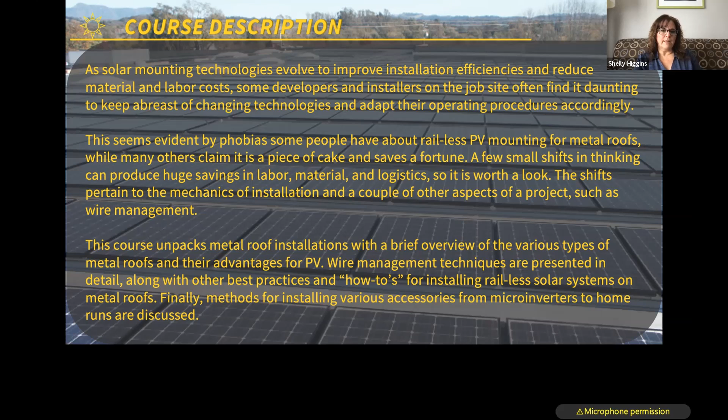So our learning objectives: upon completing this course today, you will learn why metal roof is a perfect solar platform, define the advantages of rail-less solar PV mounting systems, understand how solar on metal roofs proves to be the most economical and eco-friendly, learn best practices for design and deployment of wire management, and describe best practices for installation techniques and other balance of system requirements and components. Our focus will address these major concerns: PV system design, wire management, specific installation techniques, and module level power electronics.

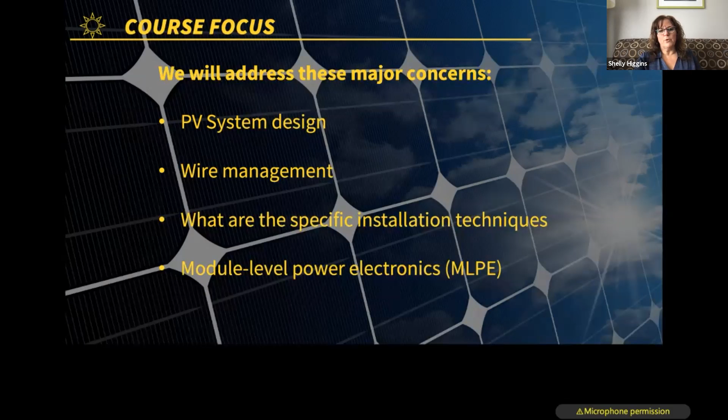The challenges we're facing in the EPC and installer space are evolving technologies. They change so quickly that once you've learned something, you have to learn it again. With installation teams in the field, this affects labor savings. If you learn new methods and use them, they can produce material and labor savings. But there are learning curves—pulling well-trained teams back to learn something new slows them down. We want to encourage you to do this anyway, because resetting the learning curve takes time but ultimately speeds things up and makes it more advantageous.

And I'm going to, oh no, this is me yet, I'm sorry.

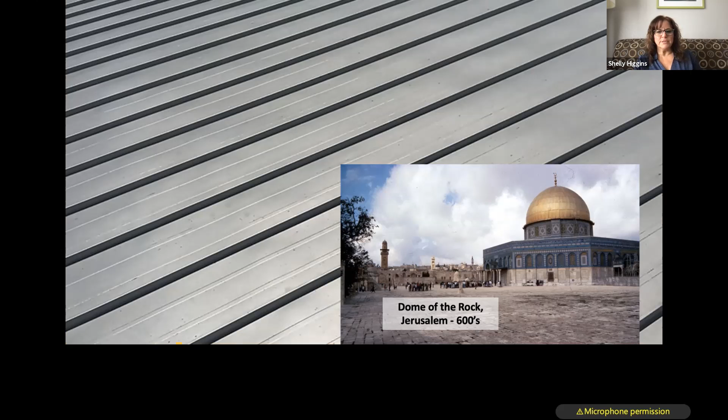Brief history on metal roofing: metal roofing is not a new thing, it's been around for a very long time. Some of these iconic buildings have been around for many years—structures like Dome of the Rock, St. Marco's Cathedral, the Blue Mosque, and Notre Dame. If you notice, they've all got metal roofs, and they've been around for a very long time.

So here we're gonna take it off. This is you, right, Mark? No. No, this is me. I'm sorry. I'm like ready to jump the gun here.

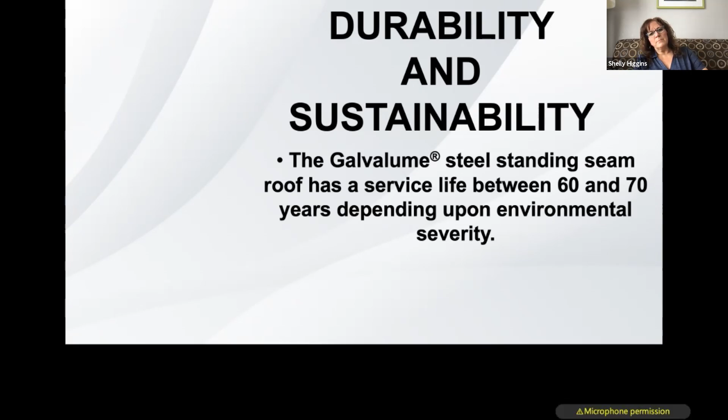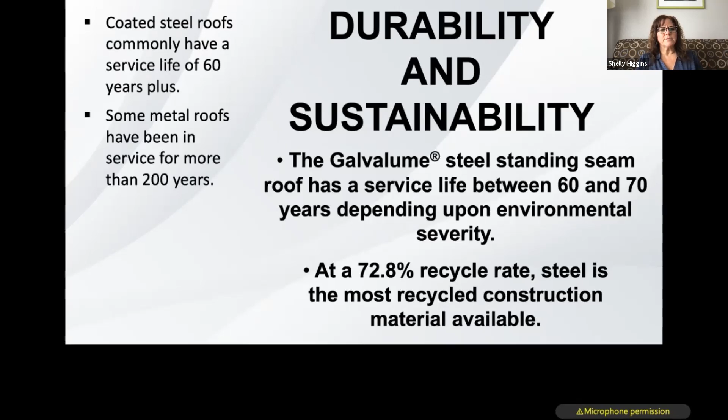Durability and sustainability: a standing seam metal roof has a service life of 60 to 70 plus years, depending on your environment and environmental severity. It's the most highly recycled construction material available. You really want to think about these things because they affect your solar system—think of the roof as your foundation or basis, part of your solar system. Whatever you're mounting it to becomes part of it. Standing seam metal roofs especially last a very long time, longer than the solar system itself, and that's something you need to take into consideration.

There are metal roofs out there that have been around for more than 200 years. Remember, the roofing is 100% recyclable, and it just makes economical sense. Last but not least, it costs less to install on metal roofs, and Mark's going to go into that.

Okay, so I'm taking over. First of all, thanks Judy and Kaylin for allowing us to speak, and thanks Shelley. So I'm going to get into really the differences—what is a rail-less system versus a rail-based system to start off with. I'm going to do it with pictures.

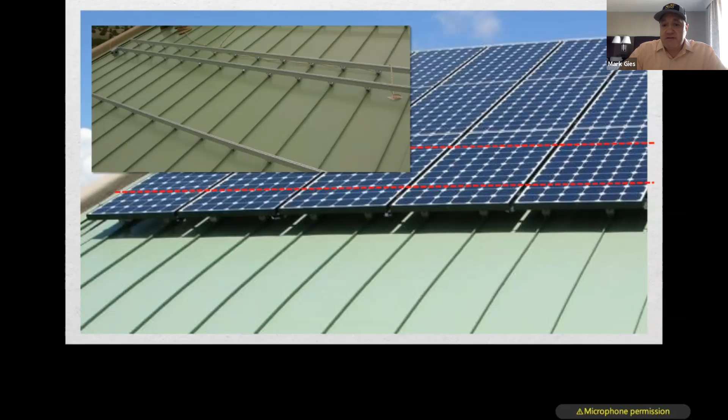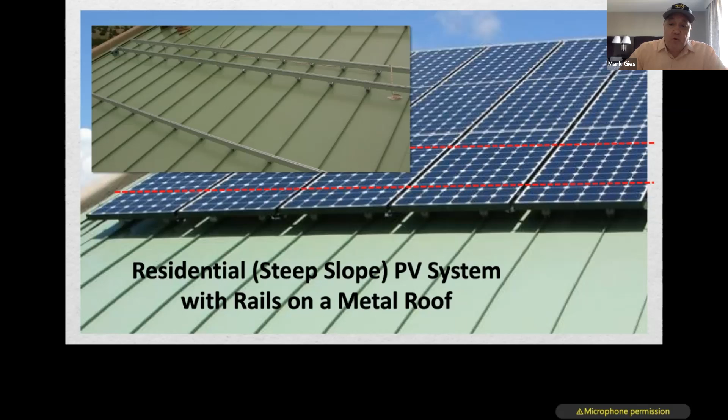And then you go down and start your real installation. With a railless system, you really don't have that first part of the installation process. This is a steep slope residential. Another thing you'll notice is that the rails go perpendicular to the roof seams, the metal standing seams, and the modules - the long side of the module - are perpendicular to the rails. So that's what we call portrait orientation.

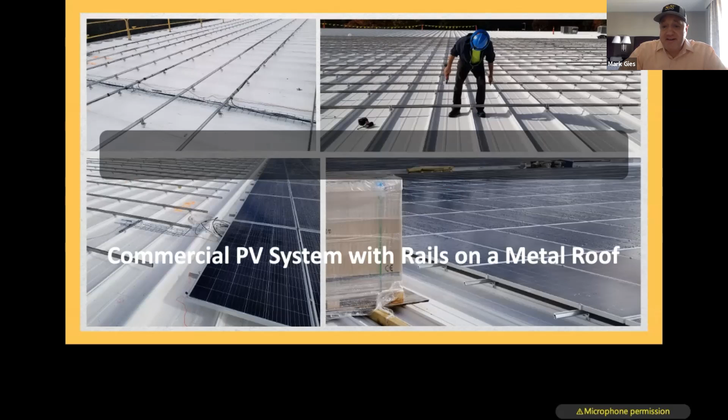Now let's go to a railless system. This is a direct attach or railless - we use those terms interchangeably. So the clamp on the module is directly attached to this metal roof, in this case standing seam. You can see that on the left. So there's no rails, and in a lot of cases these direct attach systems, you attach the clamps on the fly as you install. So you don't have that first step I was talking about.

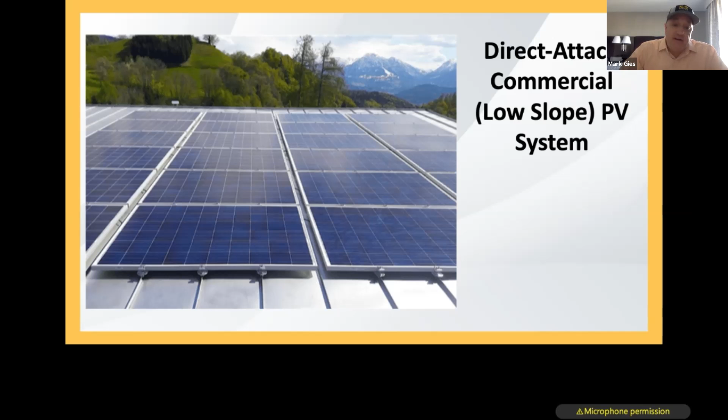But with a railless system, using the standing seam as your rails, they're there already. Here's another example of a railless system, direct attach. This is on an exposed fastened, trapezoidal roof. Same thing - this is in a high wind area, so they're mandating that we have 6 attachments per solar panel. You can see that there are plenty of the ribs there, plenty of those trapezoidal shapes to do the job.

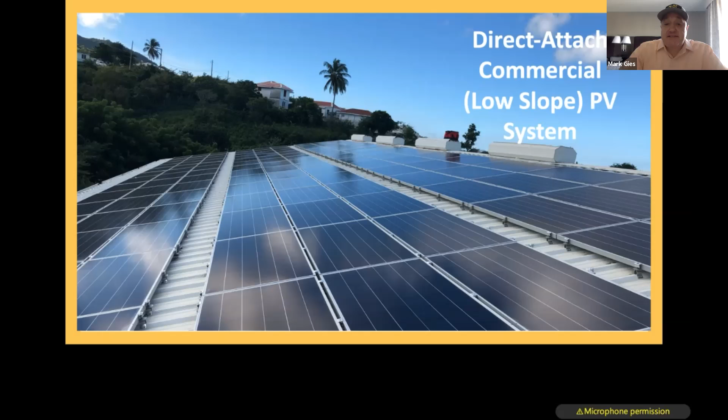The other thing that happens when you got the extra attachments in those high wind areas, it's also strengthening the roof and preventing the seam from unzipping. In the case of standing seam, the clamps actually help keep the roof panels attached onto the purlins, onto the building itself.

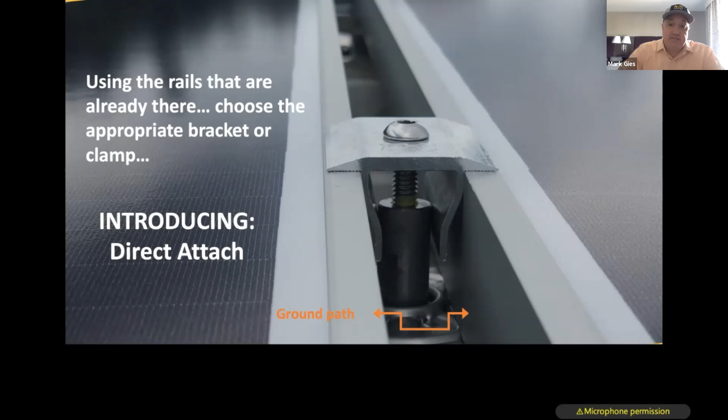One thing looking at products, there's various ones out there. One feature that some have is that bottom piece acts as a bonding and grounding element. Those modules, the frames, which have to be grounded, all the frames on a system have to be bonded to ground to meet electric code. So that achieves that without having to add wires. That's a good feature that some of these have.

Here's a more close-up view of a clamp, and it's really two pieces. Most of these are two pieces, where from that disc up is really the clamp, the direct attach, railless system. Below it are the mini clamps, and those could be most any roof clamps that attach to metal roofs, whether standing seam or exposed fasten roofs. From this disc down is basically the current technology in clamps that's been out there. So it's really a marriage of the clamp and this technology for clamping to the roof in one piece.

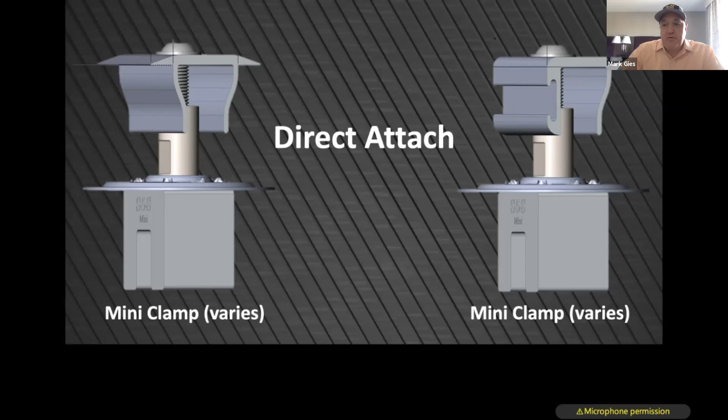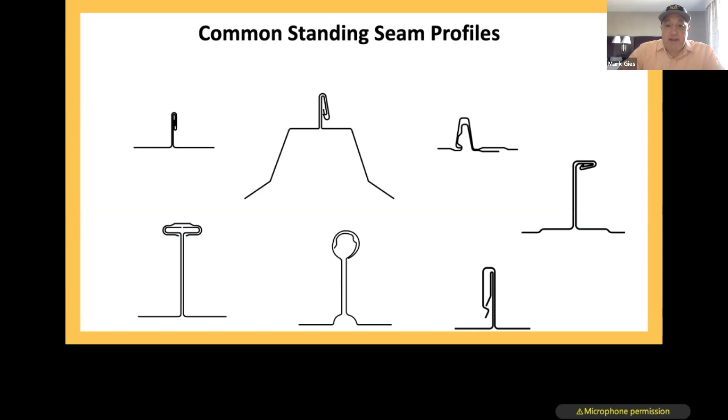So to further this point with standing seam, there are all kinds of different products out there, different roofs, different types of seams. Some are snap lock, some are mechanically seamed. So basically you need to find the right clamp to fit the right roof to then attach your direct attach PV system to that. They're out there.

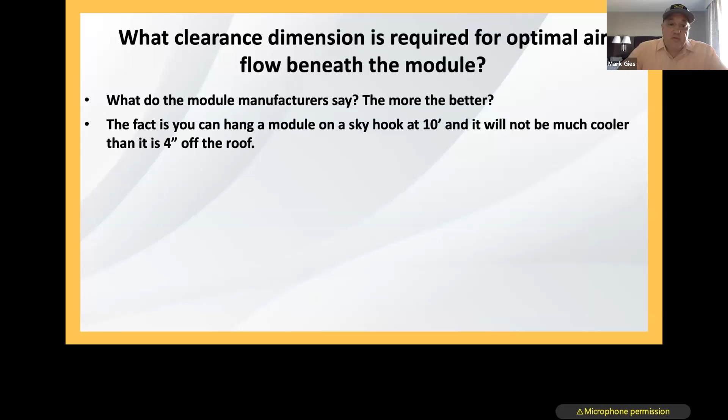Talking about that clearance, one concern is airflow. Is there enough airflow to keep the temperature down so you don't start losing efficiency in your module, which happens especially on hot days anyway. If you talk to a solar panel manufacturer, they say more is better, they want it 10 feet off the roof, which is really unreasonable and not needed. Research shows, and I'll show a study in a second, that the sweet spot is around 4 inches, and once you're past that you get negligible effects of height. So you don't want them a half inch off the roof, but in that 4-inch neighborhood, there's enough airflow to work properly.

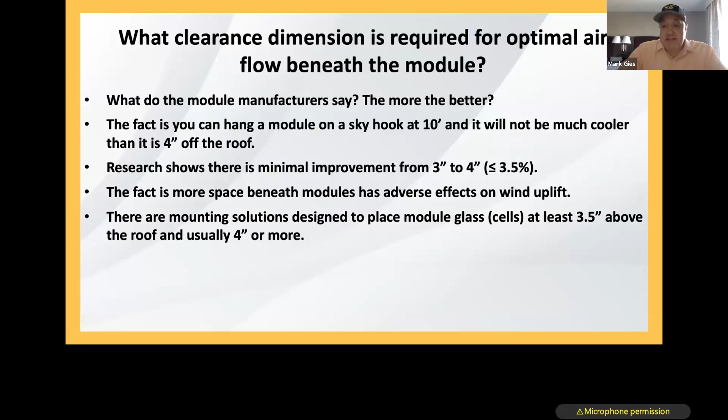As I said, the higher modules are off that roof, the more wind forces, so you have to take more care, more engineering is involved in attaching them properly and keeping them on the roof. Generally, the direct attach system is in that 4-inch neighborhood, which is adequate.

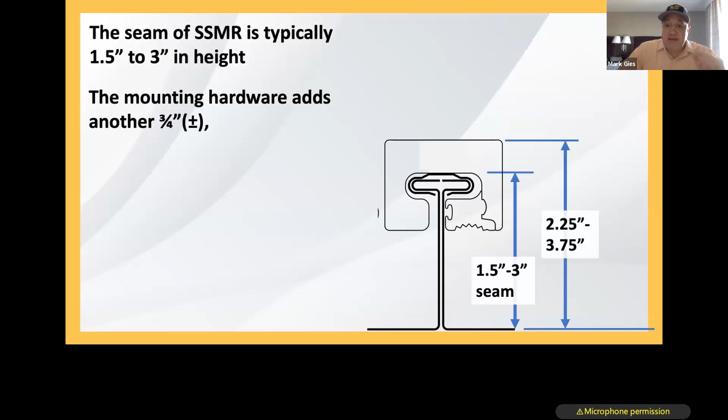Here's a typical direct attach on a standing seam roof. The standing seam can be 1.5 to 3 inches. There's the clamp, and above that clamp is the module. The module sits on that basically, with an overhead clamp on it, and that stack-up is where you get into that 4-inch neighborhood at the minimum. It's usually more than that.

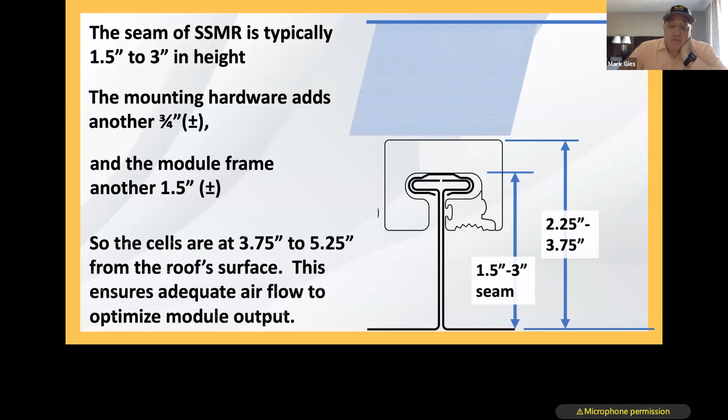You have to have a seal. In this case, there's a seal of the bracket itself, and then the screw itself has its own seal to ensure that. Products get tested to an ASTM test that you should look into, to confirm it's being done on the product you're specifying.

There are some screws that are drilling point screws that just drill a hole, and then you only get really one thread to prevent pullout, whereas some screws are self-piercing, which push in, penetrate and create a tunnel. That tunnel actually provides more thread so you have a higher pullout resistance. So piercing screws are improved, better than self-drilling screws in these instances, because these are only attached to the sheet itself, not to the structure.

Here's a universal one - sometimes you can't find a specific bracket, and there are a lot of different trapezoidal shapes out there. There are examples of these that are fully adjustable, not only from the trapezoid point of view, but can go up and down to help improve the aesthetics of the solar system in the end. You can just put a direct attach system to the top of that as well. The same thing goes - you have to look for the right product that has the right testing done and the right performance.

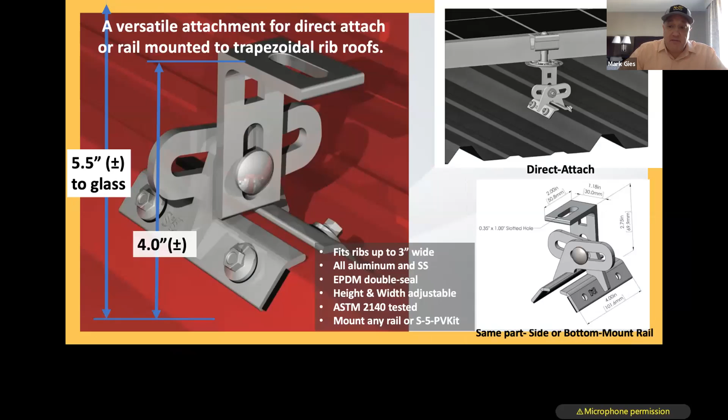I don't want to dwell on it, but here's a corrugated roof product - the same, there are products for that as well to do direct attach on corrugated roofs.

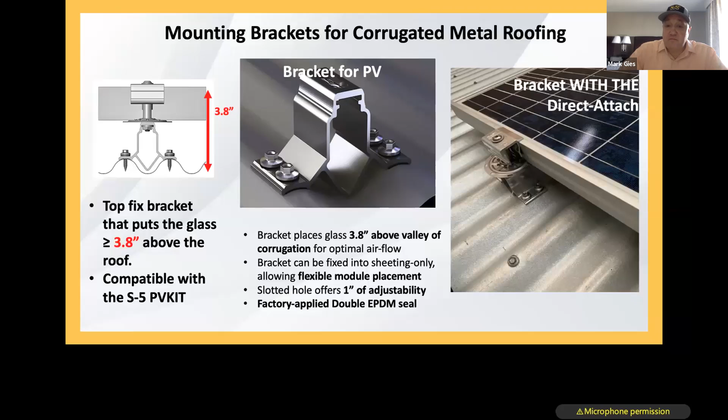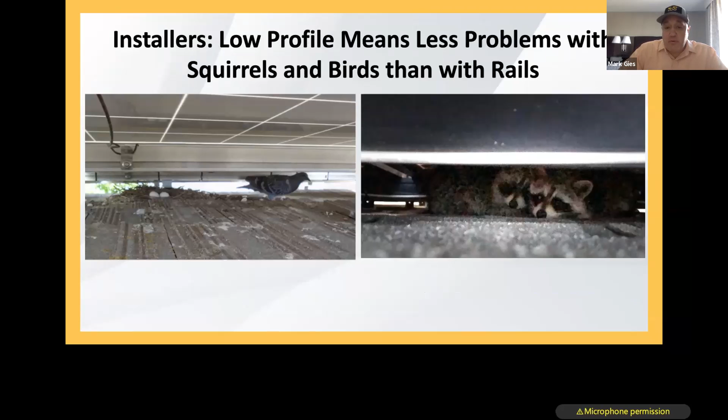Another sort of surprise bonus with low profile systems is it naturally prevents animals. With rail-based systems, you have birds, squirrels, chipmunks, and of course raccoons living under these that can chew up wires and just make things dirty. So naturally, lower profile systems tend to be better at that.

Before I jump into this, I'm going to switch over to Shelley to talk about the importance of identifying the right roof for the product.

So many of the calls I get from architects, even contractors, and our tech support - they're asking how do I know what clamp to use? How can they figure out what type of roof it is if it's been there for years and we don't know what type it is, and we're looking to put a solar system on the roof. The best way to do this is use a tape measure - get the height, get the end of it so you can see the profile of the seam, and take a picture. That picture is worth more than you can realize.

The various companies are able to look at that. You want to know the width of it, you want to know the height of it, we want to see the end profile. And if you're not able to get a picture, draw a picture of it for us, for the manufacturer, and they'll be able to help you choose the clamp that will help, because the clamp is separate from the direct attach, and you need to make sure you're choosing the right attachment method.

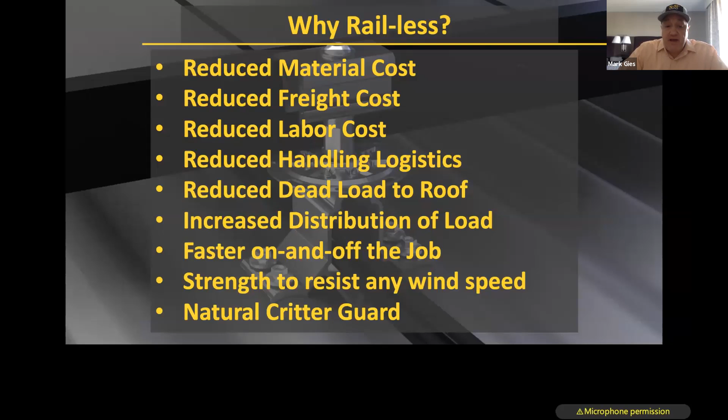As well, there's less weight on the roof, so it's safer for the roof. We'll get into this as well, but there's actually an increased distribution of load. So that dead weight and snow loads and wind loads are distributed more evenly over the roof than with a rail-based system. And because it's faster on and off the job, these tend to be lower profile, so they're stronger for wind forces generally. And as I said, you have a natural critter guard as well.

All right, so I'm going to show a quick video of the basics of the tricks of installing this to show the benefits on a labor perspective. Let me see if I can get it.

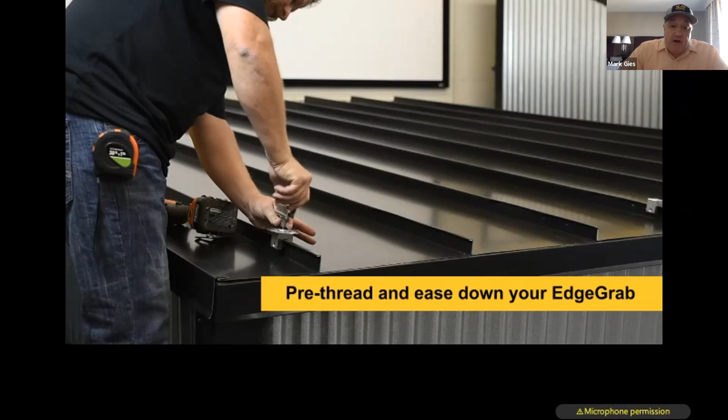So putting a clamp on, what you do is you snap a line and put the clamps along the front row. These are for systems that you can do this on the fly. So you put the first module in. This is high speed, and I'm trying to keep up with it. But the only ones you have to measure is that first row on your eave. From then on, the rest go on using the module as a jig. So that clamp is put on as that module is laid in place, not before. So there's no measuring, you're not up there putting down rails. And then these things are adjusted and then tightened down.

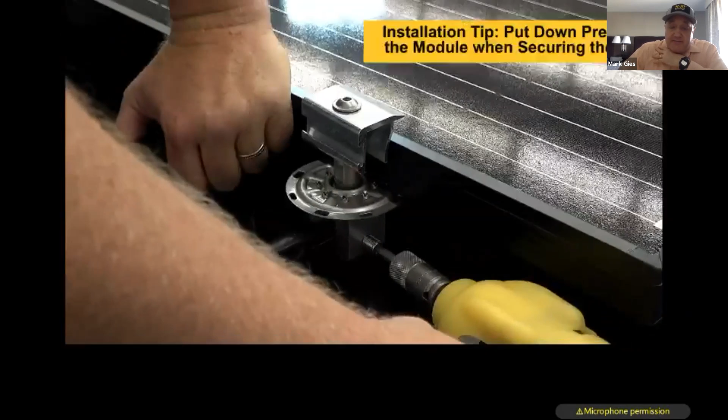I'll show you another quick video, a quick perspective of this. Hold on, so here we go. So that's sliding in place. It's a little fast, but on the fly, the clamp is going in, and that's the beauty of being able to do it with direct attach, and you can attach it on the fly. That's where your time saving is.

So let me do a quick cost comparison. And we did this analysis. We tried our hardest to get the best, the most accurate pricing, and we use a generic system of comparing rail versus railless. But of course, every project is different, every project cost is different. So this is, we think, a good example, but there's a disclaimer. So this system is 150 modules, and I'll show you that.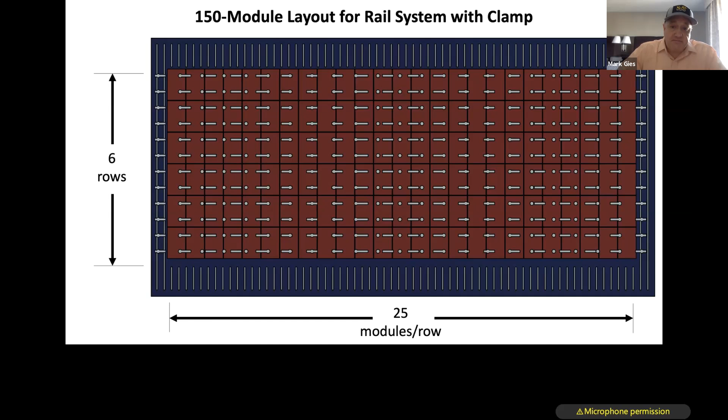So from a labor perspective, our estimate is that you'd have 96 man hours to install this. And this is the basics of the installation, doesn't get into electrical stuff, versus 67 man hours to lay them in, connect them, attach them, and connect the basic wires.

So looking at the bill of material, you can just look at the bill of material, what a difference the bill of material is, a lot less product. And obviously this is where also you get some serious cost savings because there are no rails. So it's close to half the cost of materials. This doesn't count modules or inverters or anything else. This is just comparing the attachment system.

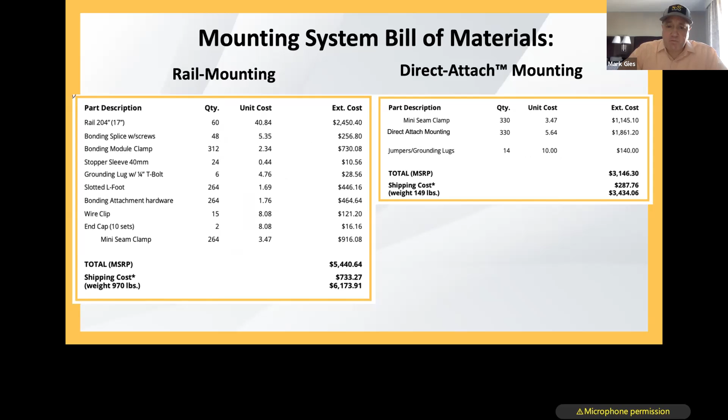So all in, the summary of it is, from a material perspective, you could say 40-ish%. Labor is 30-ish, we believe. And shipping cost is extraordinary. I mean, it's not a big ticket item, but it's still a big cost savings on a percentage level. So all in, you could be upwards into the 40% range of cost savings for that part of the installation.

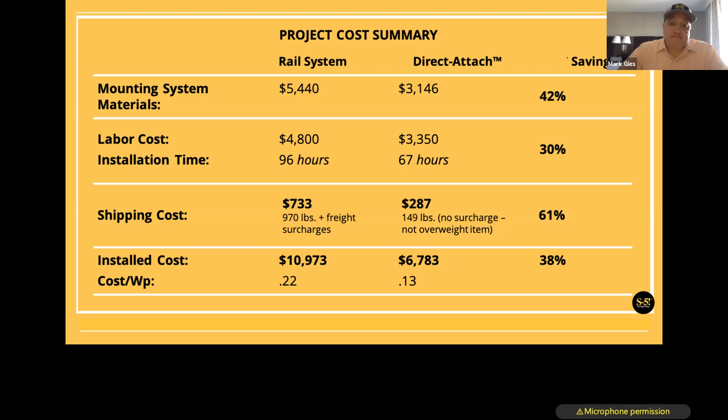And other factors, and the big one is weight. The weight savings, you have 85% weight savings by not doing rails, basically. And you can see that. Also, and I'll show that in a second more, is that there's more points of attachment actually with a railless system, and so you have higher distribution of loads. And the footprint is basically the same. We'll get into that a little bit as well.

So a picture is worth 1,000 words. I usually say that wrong, but I said it right. Here's 250 kilowatts of rail for a rail-based system. This is actually a project I was involved with years ago that was going from Massachusetts to California on this truck, 250 kilowatts. And now this is 250 kilowatts of a direct attach system.

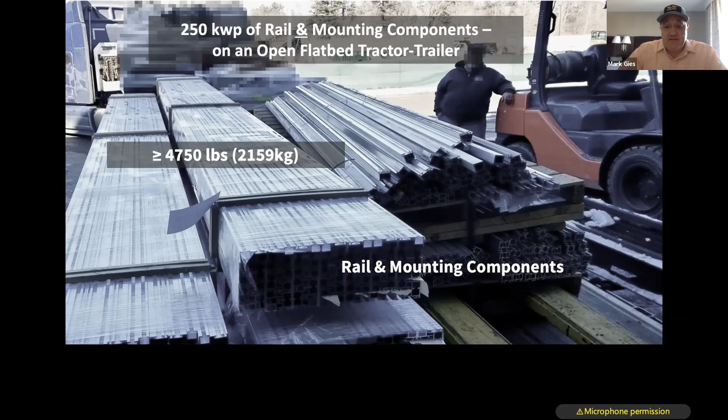In a short bed truck. You could put it in your car. Put it in my car.

So now I'm going to get into sort of the system differences. We're going to first really show what rails really are there for and how seams can do the same job. And then we'll talk in detail about wire management and installation methods, and then module level power electronics, which are optimizers and micro inverters, and how those all fit in and how you don't need rails for those.

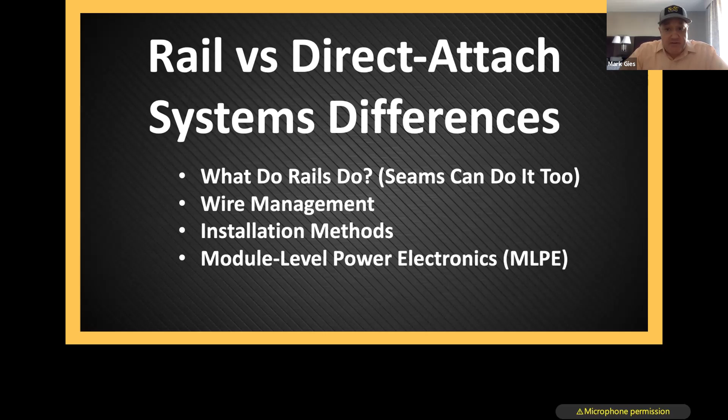So rails do not provide structural integrity to the system. They don't. Once they're installed, of course, they have to be strong enough, but that's not why they're there. They're there because they interface the PV modules to the ribs and seams of a metal roof, which is purely geometry.

So the rails attach to the proper place of the modules, and then they attach the roof. But as we'll get into, your ribs or standing seams can really act in the same way. One big thing is that a shift in thinking is going away from a portrait orientation, because now the rails are perpendicular to the seams and the modules are perpendicular to the rails. But now with a railless system, the modules are perpendicular to the rails because the rails are the seams.

So this is to demonstrate the point I was saying about more or less touching points. This is a rail-based system. Every module is clamped to that rail in the same way, clamped down to that rail. So every edge of every module is clamped down. But the rails can now touch the roof however they want. Generally they're 4 foot, 5 foot, 6 foot on center. So you see 3 or 4 modules, and right here on this edge, you see 2 clamping points to the roof. They're only attached twice to the roof. But yet if you look above it, you have 3 points of attachment from the modules to the rail.

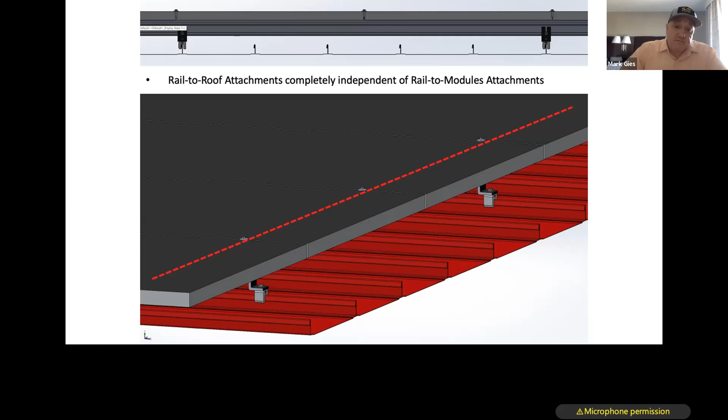Now let's look at the same thing with a railless system. The clamping points to the modules are the same as what attaches to the roof. So as you can see, you have more attachment points to the roof itself. So the load is transferred, just distributed more across that roof, which is better for the roof. Big point.

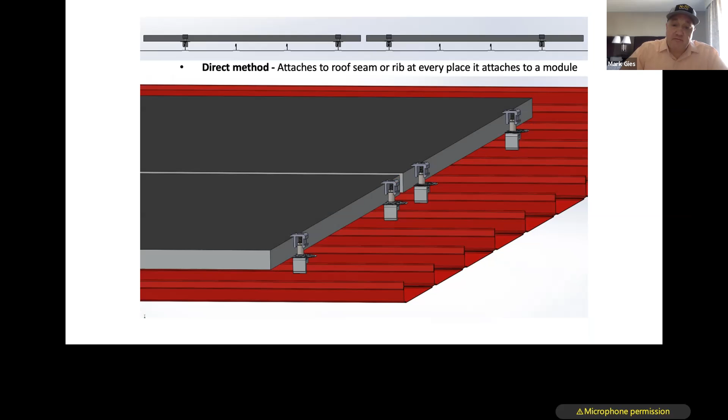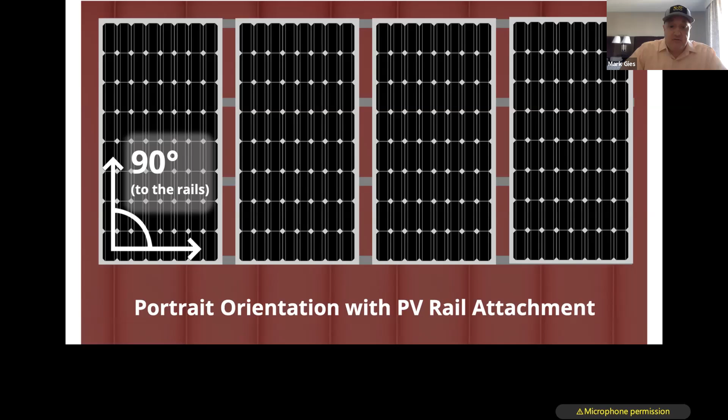Just to show this again, if you're not getting tired of it, this is a rail-based system, which is portrait orientation. You can see the rails below it, and you can see the seams running vertically down the roof, as if you're looking right at a residential roof. And a railless system would be in landscape, using their seams as the rails to connect. This is not totally set in stone. You can see rail systems that are landscape to the roof, and you can see railless systems that are portrait as well, because it all gets into where the locations of the seams are and where you want to touch the solar panels themselves. We'll get into that now.

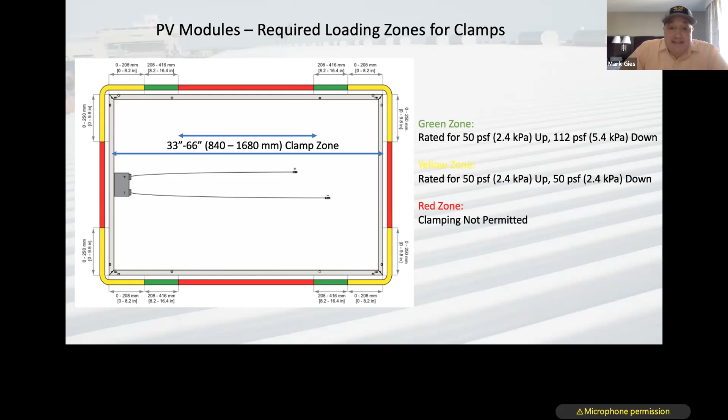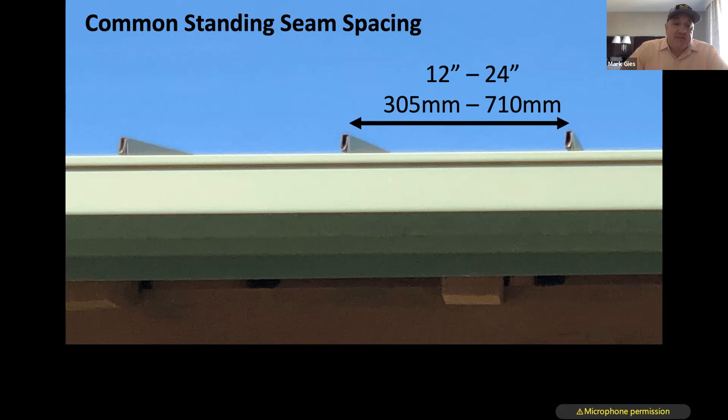In this case, these are 33 to 66 inches apart, but roof rib spacing can vary. For a standing seam roof, they can be 12 to 24 inches, with some basic sizes out there like 18 or 16 inch. 12 to 24 inches is very common, and that's what you have to match up with. On exposed fastener roofs it's tighter - a trapezoidal roof is more like 6 to 12 inches, and a corrugated roof standard is 2 3/4 inches. So there's a lot more of those to line up.

So that's the puzzle - the puzzle and the hesitancy is how do I line all that stuff up? But it's really a simple geometry problem.

Here's a real case, a real project lined up. These are 42-inch spaced seams, which is on the high side. Generally, the tighter the seams or ribs are, the easier it is to make all this work. So this worked, but we had to have every 2 modules with a 10-inch gap in this case, because you're matching up the loading zones on the modules with the ribs. So you have that, but those are actually good.

There's benefits to having aisles for operations and maintenance, known as O&M. First, installing is easier if you have gaps to walk through. Long-term, for repairs and maintenance, it adds benefits too. I understand people want to put modules as tight as possible, but there's definitely benefits to this. In this case we had to do that, but if I shoved all those modules together, I could not add another module to that system. That's just an example.

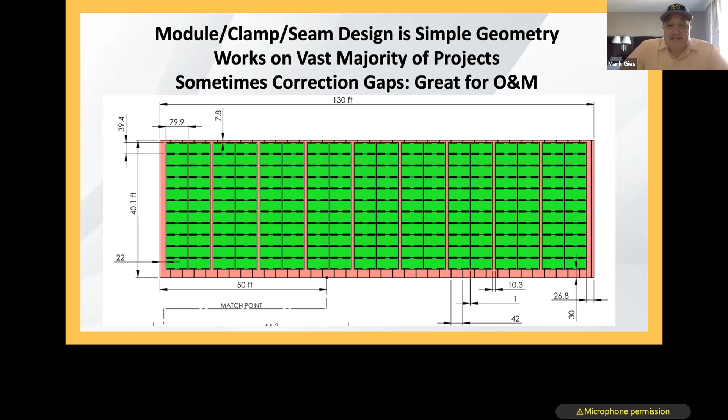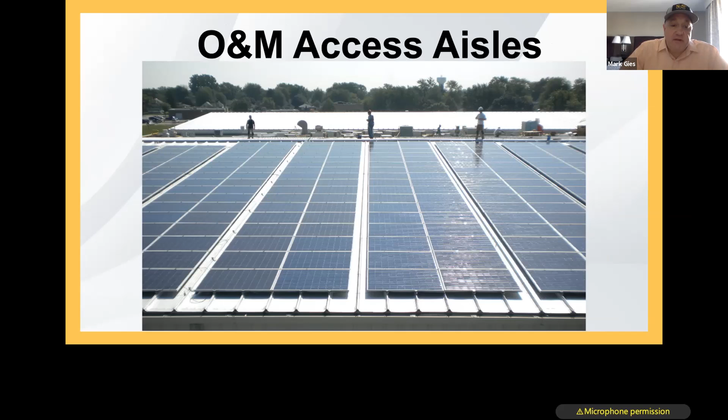I think I better start speeding up. Here's a common one - I know this solar developer who makes sure there are aisles; he designs specifically for this. Every other module there's an aisle, so you can get access to all the wiring and wire management, and every module can be accessed without having to step on a module, which is not good. It's not uncommon to see people, if they have the space, put aisles periodically like this for O&M, and it makes a quicker installation as well.

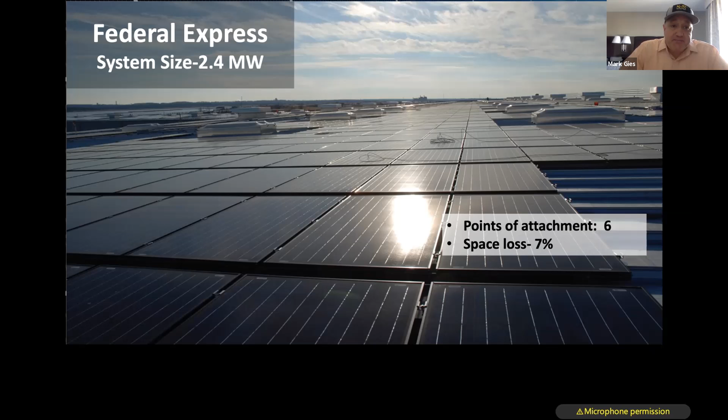Here's some examples of a FedEx building, probably on the bigger side. This is a 7% space loss from correction gaps for direct attach. In Germany, it's much less - this is direct attach, and you really can't see much difference in the gaps unless you look closely. In most cases you can put as much as you want wherever you want, but you have to pay attention to that part of the design, which is a new thing with direct attach on metal roofs. All right, I better speed up, I think.

Let's get into some of the details of wire management. The basics are that a module has a positive and negative power conductor - two power conductors come out of every module. I'll use the term positive and negative, meaning it's basically a DC power structure. The module creates DC power, and it comes out of those two power conductors.

What happens in a very common type of inverter, which converts DC to AC, is a string inverter. Modules are put together in groups - that group can be 10, 12, 16 or more - and they're connected in series. At the end of them you still have one plus and one minus, which has to be routed to that string inverter, shown in red and black wires. That's the trick: you build these strings, interconnect them as you lay the modules in place, and end up with an end of a string where you put a jumper and jump all the way back to the inverter. So that's a string.

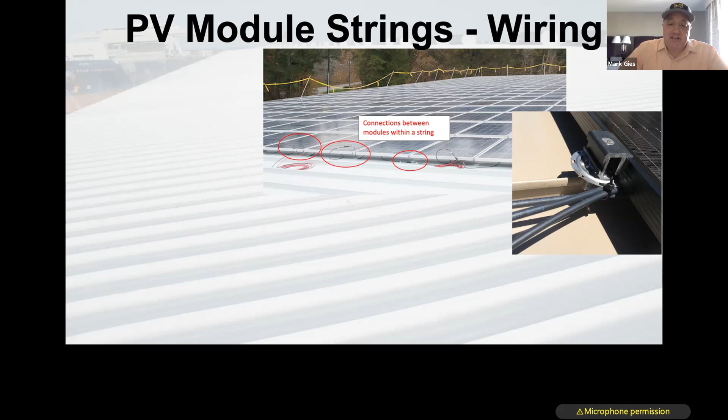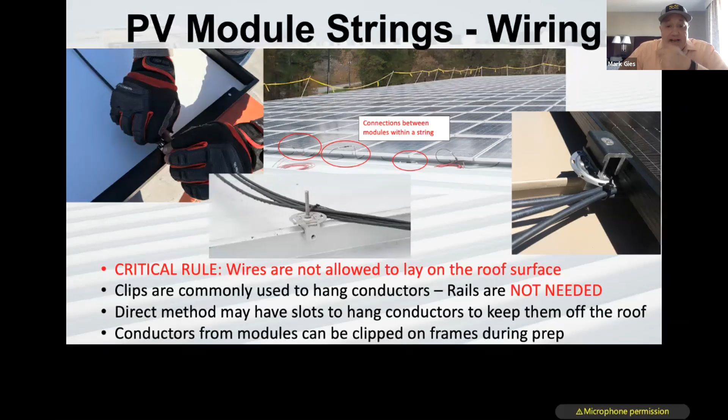The key element is that wires cannot sit on the roof long term. During installation you can, but when it's all said and done, the wires all have to be tucked up, and it's very common to tuck them up into the module frame itself. That's very common, as well as clipping them to various things. Some direct attach systems have slots to wire tie bundles to. There are other methods, like wire trays you can put bundled wires and jumpers in. But it's key—an important rule is wires cannot lay on the roof.

There are two important points I'll try to drive home in this area. One is module prep. In order to really take advantage of the time savings of installing a railless system without the rails, module prep is really important. It's important to get wires tied up so that when you're up on the roof, they're ready to go.

So just picture on the right, they're installing that module in, and he's connecting the two conductors together as you're putting it together. He doesn't have to worry about where the rail is, putting it on a rail. The picture on the left shows what it takes to do that. All that work is done off the roof, on the ground, or maybe in a staging area, but it's like an assembly line where you throw a module on and you just clip it up, and they're all done in the same way, so it's really like a machine doing this.

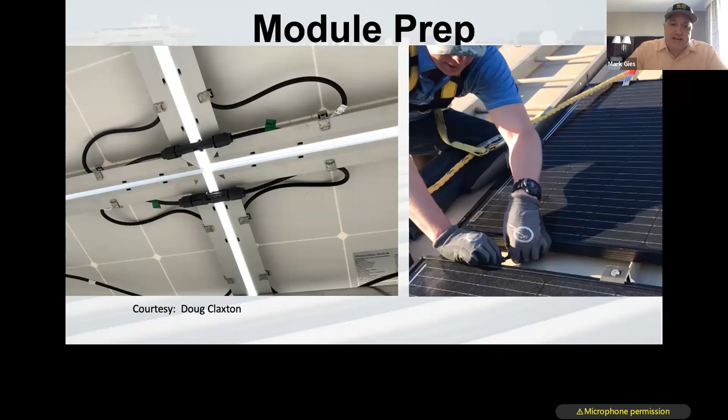And the better you do there, the less time you're on the roof. So that's very key with direct attached systems, to do that prep and to design that well.

Here's clips, and I put this in here because there's just clips, all kinds of clips out on the marketplace now that can do very specific things. So whatever your need is, you could have a multi-lumen, single lumen, whatever the need is to attach these wires to the frame or whatever—they're out there.

So let me show you. Now we're getting into the subarray level. This is a solar array, and you can see the strings have the pluses and minuses where that string ends. The key is getting the jumper from the modules that have the end of a string—they may have a minus conductor that has to be routed to the inverter.

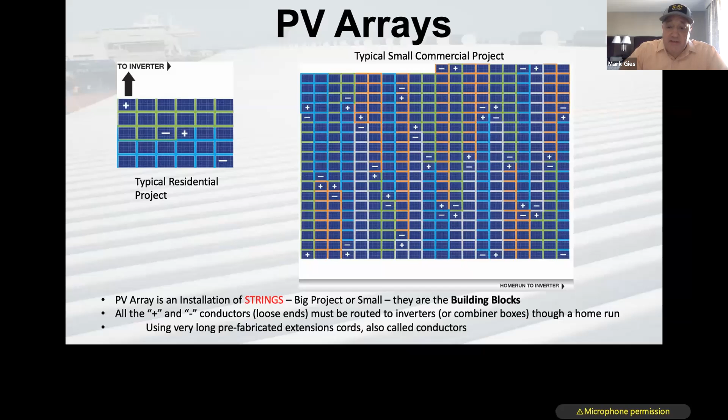The one on the left is a typical residential system—you may have a few strings. The one on the right, there's a lot more. It's much more complicated. There's a lot of pluses and minuses in there, and a lot of string ends that have to then be brought down to that home run.

So the other key point—I said one key point was module prep—the other key point is strategic string design. In the picture on the left, they're just in series. You lay down a string and the next one follows, and you go up back and forth, and the pluses and minuses are everywhere.

As you build, you have to put jumpers on there that have to be routed down to your home run. The one on the right, there was a little thinking done—they arranged each string so the pluses and minuses of those string ends are toward the bottom, so there's less jumpers, less work for that. As you can imagine, there's a big difference between the right and the left, which is very important.

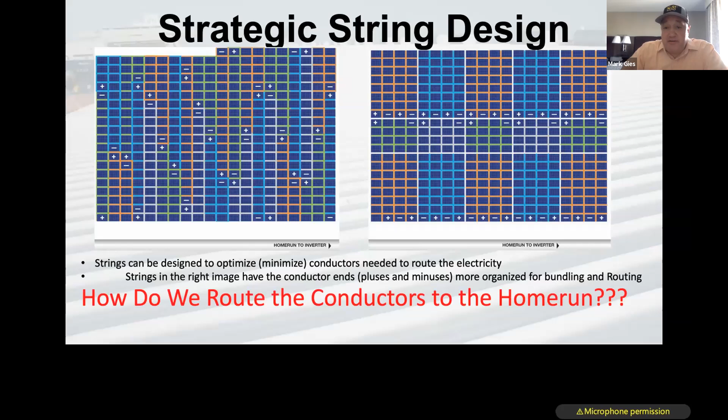And the key is now, how do you route those to the home run? This is, to me, the ultimate idea, where they created an asymmetrical aisle down the middle, because they had 16 strings of 16 modules. I modeled this on a spreadsheet, and you're able to say all my string ends are at that aisle. So you don't have to work with string ends in the middle of the subarray. You can build this system, then go in after and run your jumpers to your home run by just walking along those aisles, connecting them where your string ends are right there. You can just reach under and do it. This is ideal. You don't always get that, but it's an example of how ideal it can be.

For residential, it's not that big a deal. You get a couple strings. It's not a huge effort as you're building to tie up the jumpers as you move. You don't need rails—you can still easily clip those on because it's just a few. And then you'd have conduit that is your home run, and that goes into the house, or to the side of the house where your inverter is.

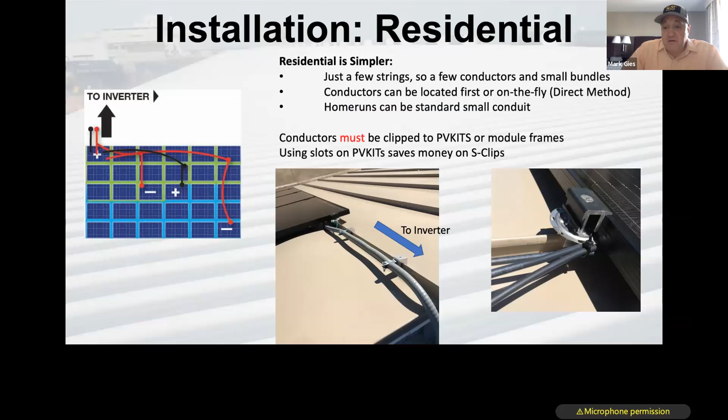Simpler. So now when we get into the commercial side, it gets much more difficult. You may have subarrays sprinkled around a roof that are 100, 150 modules. That's a lot of strings and a lot of jumpers needed to run from those string ends down to your home run.

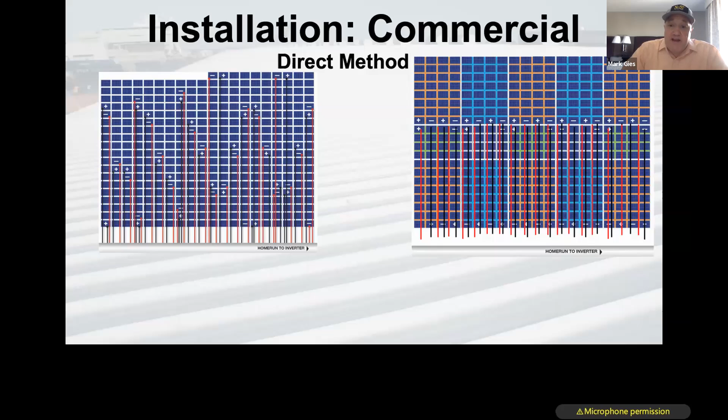You can look at it. One common method I call the direct method, where as they're laying and connecting the module in, as we saw with the video, if you see a string end, you plug the jumper in, and as you're building, you just keep that jumper off the roof. This is where you can see the difference between the strategic design on the right, and there's just less of that work on the direct side.

Going through these, I've already been talking. I'm not a good clicker.

Now I'm going to show this again, the strategic string design. You can see again how, by designing the string ends to be there when you're laying the modules, it's such an easy task to do the wiring. You do not need rails. And by the way, even if I used rails, you'd benefit from doing a strategic string design. I think with rails, people just find it easy not to worry about it, but you still benefit from that.

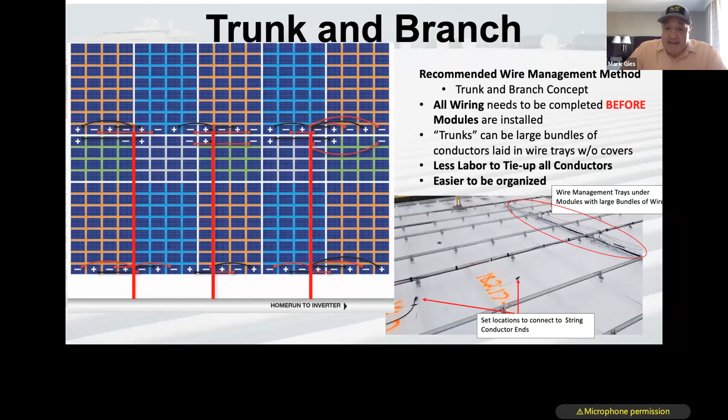A lot less work. The picture on the right is actually a rail-based system, the same multi-megawatt system I talked about, and they use that same technique. You can see a wire basket, a wire tray that they use. The string ends you see in the foreground are zip tied on the rail, but only up to the point where the wire tray is, and once they're in the wire tray, they don't have to worry about it. So it's definitely a time saver to do this method if you need to with a railless system.

A version of this that I like as well is making gaps that are needed, maybe 12 inches here and there, to be able to put the wire tray on the outside of the subarray or tucked in. That way you bring those wires out as you're building, but you do the wire tray after, which makes it easier to access for long-term O&M.

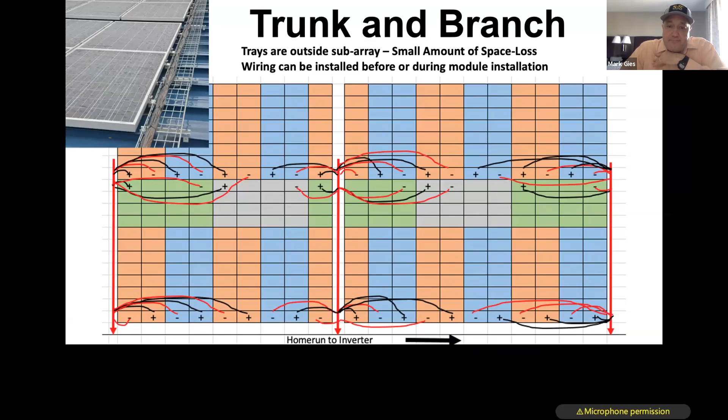All right, so I'm going to get away from wire management and get into steep slope. One nuance of steep slope with rail versus railless is the technique itself, and it's all about getting footholds. The technique we're promoting as a good way with direct attach is to build column by column. I'll show you that, and it's similar to what we showed in that little video.

At the bottom along the eave, you put your direct attach clamps in, snap a string and get those lined up. But after that, you can build column by column. You put the module in and the clamps go in on the fly. You just repeat, putting the module in like we saw in that video, and the clamps go in on the fly, using the module as the jig.

The benefit of this, I should mention, is that if you have scaffolding and did a whole row across, you'd be moving the scaffolding all the time and have to walk over the row to the next one. By doing this column by column, you can have scaffolding right next to that column as you're building, and all you have to do is move up and down that scaffold, finish that row, then move your scaffolding and start the next column. That's the really efficient way to build on a steep slope roof, since you need to be tied off with safety harnesses and scaffolding to be safe. It keeps going and going, column by column, no measurements, no rails.

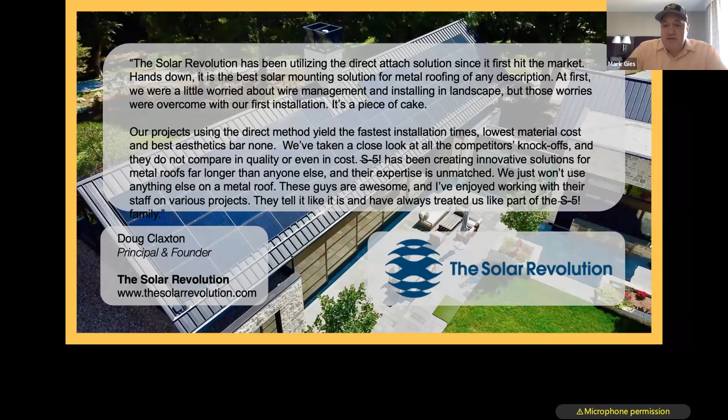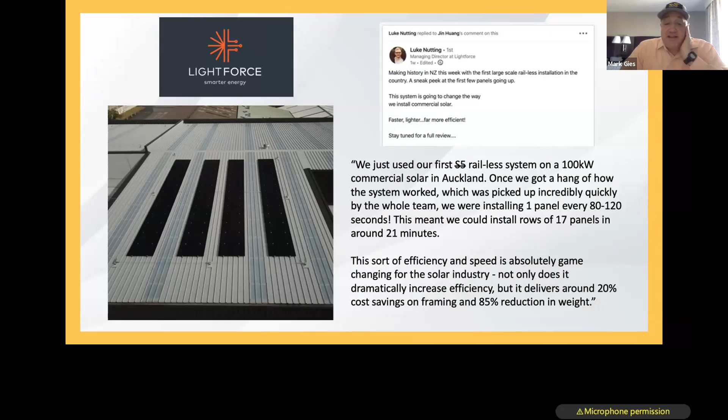Testimonials. So this is one from somebody who's been using a railless system for more than a decade. He's based in Colorado and has given us advice on some of the nuances of these techniques. Once he started using a railless system, he would never go back to a rail-based one. Here's another one from New Zealand, the biggest railless system installed there at the time. Not only did they love using direct attach and not having those rails, but from a timing perspective, they were installing modules at less than 2 minutes a module, and that was a first-time crew in New Zealand using a railless system.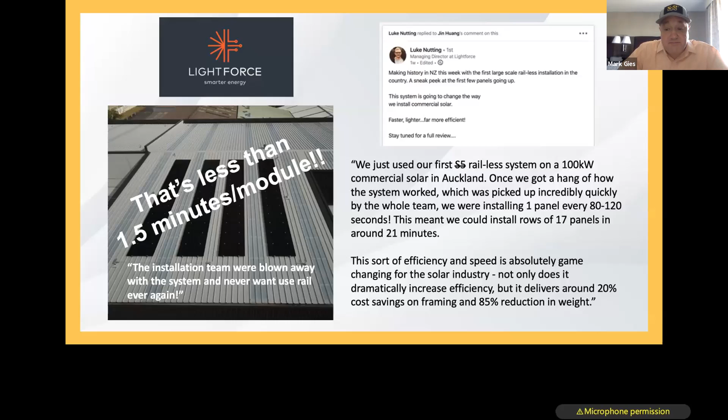Again, I can't stress this enough: that module prep ahead of time is key. If you clip up those wires, everything becomes repeatable, like an assembly line down there. If that pigtail or conductor end is right where you need it as you're sliding the module into the clamp, you just clip it in and you're done. There's a lot less time involved if you do that work ahead of time, not only designing it and deciding where we want those pigtails, but reproducing it 100% on the ground before you put it up on the roof.

Very important. Again.

One point is, if you're really trying to compare them in real life, using a rail-based system is also very tough. Steep slope installations are tough no matter what you're doing. They're not easy, you have to do them well. These are examples of hilarious extreme cases, but it's driving home the point that it's not easy. Even with a railless system, there's work and you have to lean and stretch, but with the rail system you would do the same.

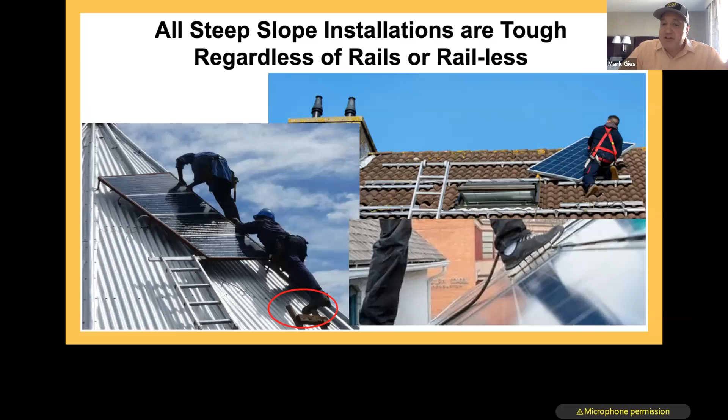Just because you can, the fallback is to use the rails as stepping, as scaffolding, which you can argue isn't really the proper way to go anyway, but it's just easy to do. That's not a reason to do that though, and it's an expensive way to go about it. If you're putting rails up only because of a one-time scaffolding use during installation, it's very expensive scaffolding that you can't take back and use again.

I'd say the same thing with wire management. If the only reason you want rails is for wire management, that's expensive wire management.

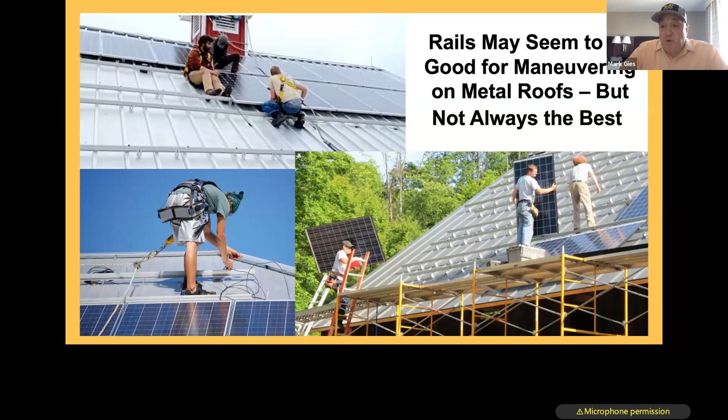Getting back to a railless installation, you can see he's leaning over, doing that column next to it, and then they slide over and start another column. The module is lowered into place and attached. It's not incredibly easy, the installers are stretching, but even if you had a rail-based system, there would be some difficulties there too. It's not easy either way.

It's kind of scary being up on the roof. I've been on enough roofs, it's scary up there.

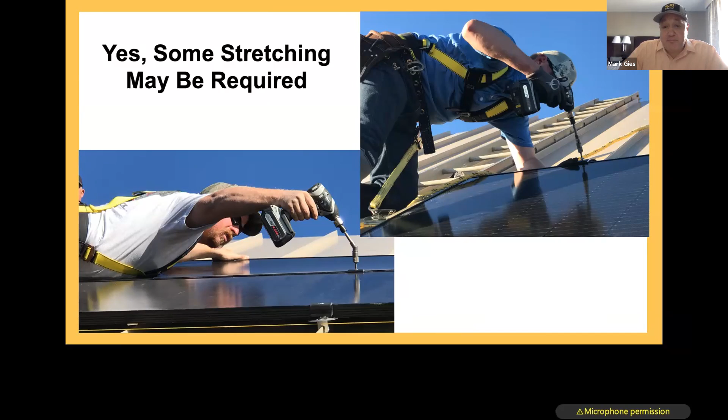Just more pictures of that. It's so key, as you can see, if those pigtails are ready to go with the conductor ends, you're just snapping and plugging those in. You don't have to worry about clipping anything up on the roof. That's key to time savings.

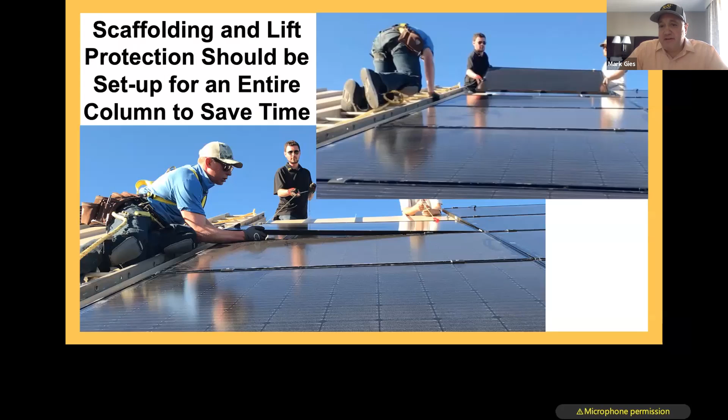This is specific to standing seam roofs. There's scaffolding out there and fall protection that uses the same technique, squeezing the seam so it's not penetrating the roof. You don't have to do sophisticated things, it's pretty simple. The picture in the center is one being used to put solar in, so that scaffolding can just be moved around pretty easily, up and down.

All right, so let's get into module level power electronics.

There's now three types of module level power electronics. You have microinverters, where every module converts from DC to AC; optimizers, which are DC and just better control the electricity coming out of every module, making everything more efficient and producing more power from your system; and a rapid shutdown device, used to be in compliance with rapid shutdown code, which is now in effect. So these things have to be put somewhere.

I'd say in most cases, putting them on the module is the better way to go, especially with optimizers and rapid shutdown since those are DC. In this picture, you do this on the ground in your prep, it's very little extra work. You put the module on the frame, the optimizer on the frame, you plug it in, clip up the wires to the frame the same way, and end up with the two pigtails the same as before without the optimizer there. All that work is done on the ground with very little extra time. That's a no-brainer. I don't see any reason why you'd want to put an optimizer on the roof ahead of time, but people do it.

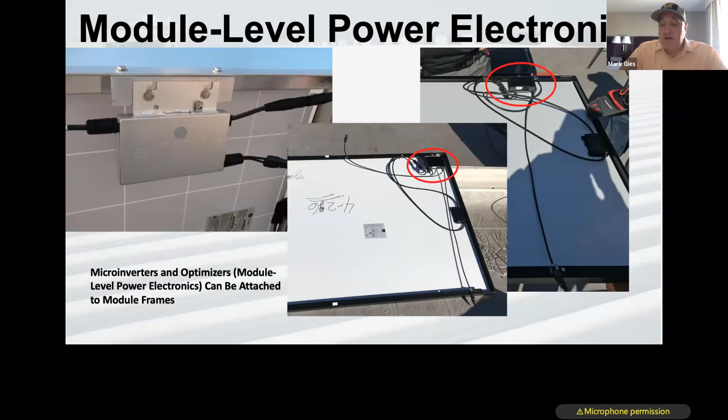I think in a lot of cases it's just better done on the module, and if you really want to take advantage of the time savings of not having a rail-based system, that's a good way to go. Again, I'm showing this picture of clips - you can solve all these problems with the specific clip, getting all the extra wires from an optimizer and from the module itself clipped up into a tight, neat package that can go up on the roof and be installed quickly.

These things can obviously be put on the roof, and there are products out there where the same clamps you use to attach your direct attach system to the roof can be used to attach module level power electronics as well. So it can be done, and companies support that as well who make this product.

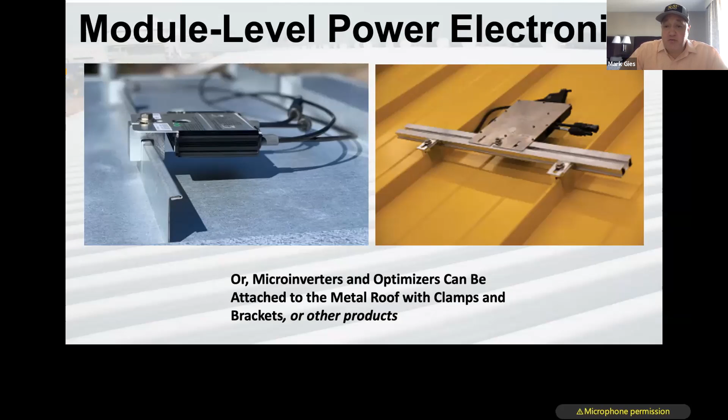Here's another example. This is a corrugated roof, using a bracket for that and putting the optimizer on the roof directly. Then as you put the module in place, you have to clip it and then plug it in.

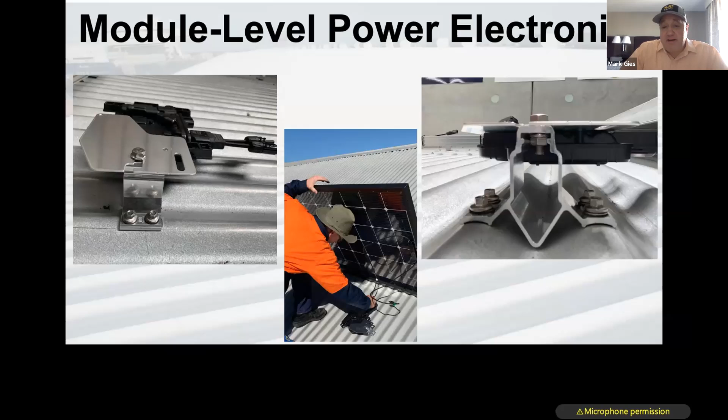But in most cases, I really believe it's good if you can do it on the frame ahead of time, on the ground, as part of your module prep. Here's another example, this is a trapezoidal roof, with microinverters on the frame ahead of time.

So I say optimizers and rapid shutdown devices are a no-brainer to do. Microinverters are a little different. They're AC, so you plug two plugs into the microinverter from the module, and then one single AC power trunk, a big thick cable, interconnects all your microinverters.

So you really can't do that as part of your prep on the ground. What you can do is still install the microinverter on the module and lay the cable ahead on the roof in its place. Then as you're putting the modules in, you're still saving a lot of time. You're clipping those, you're plugging the AC trunk in because the microinverter is already in place.

There's specialty clips for that, so that can be easily done as well. It's a little different than optimizers.

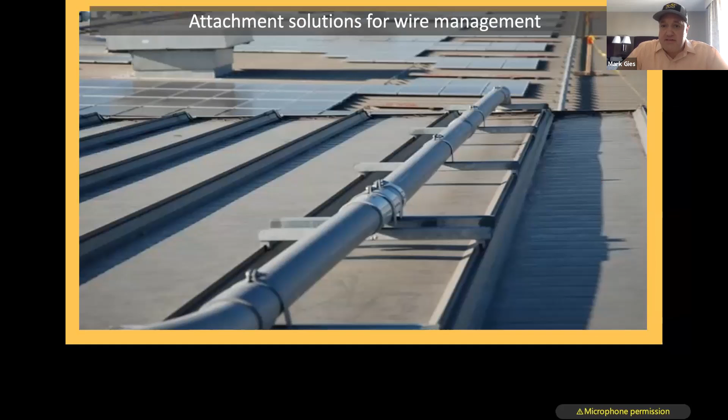All right, so I'll end my part with this. There's balance of systems, you have home runs, you have combiner boxes, and those can all be connected with the same clamps you use on a metal roof. So it's easy to put solar on a metal roof.

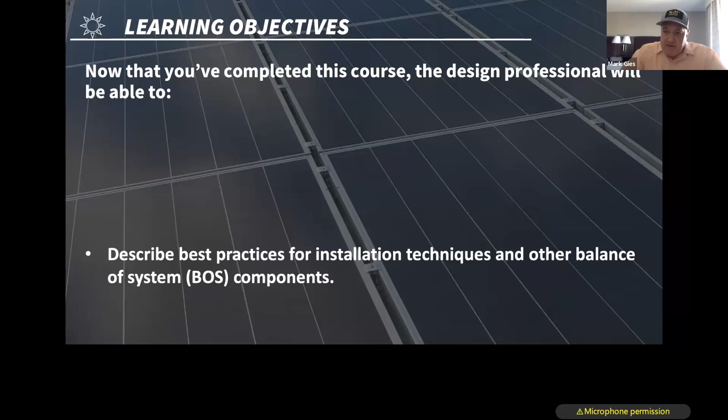Okay, so now that you've completed the course, you now know why a metal roof is a perfect solar platform. You can define the advantages of rail-less solar PV mounting systems. You should understand how solar on metal roofs proves to be the most economical and most eco-friendly option. You should now know best practices for design and deployment of wire management, and describe best practices for installation techniques and other balance of system components.

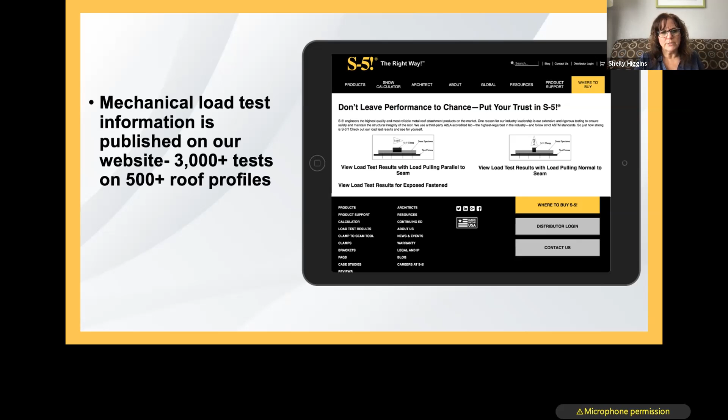We actually have a question that's come through, and I think it's something that might be of interest for everyone that's still listening to hear. Are there any fire safety performance benefits with railless solar installation compared to rail installation systems?